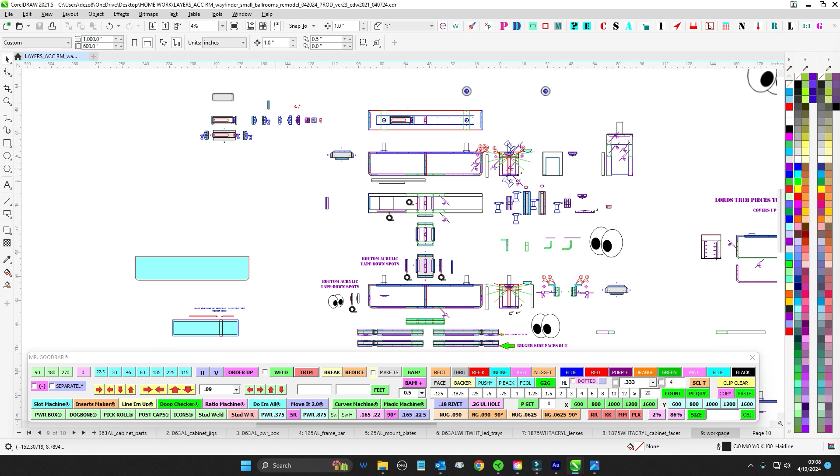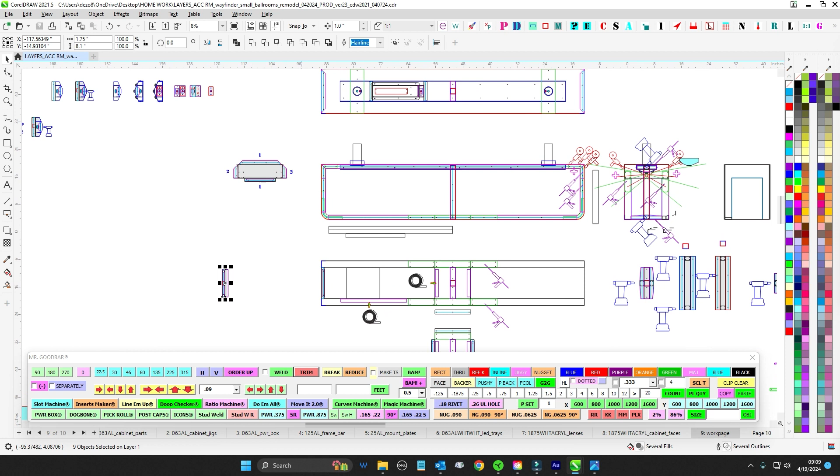Right, so it's that time again. Got ourselves another one here. So this is going to be kind of a quick review of the ACC hanger. I know that's old news for you guys, you've already made it, but when I opened up this file, because it's from 2016, I was like, what was going on? It wasn't as bad as my really early stuff, but it wasn't as organized, and it was before I started labeling things clearly, so everything was spread out and I was like, what's this piece over here? So in order to save you guys from that, and I'm sure you'll get back in the groove since you were already working on this, I just want to point out some stuff. I know you've already started on the lenses, but just to refresh my memory, let's go down memory lane real quick.

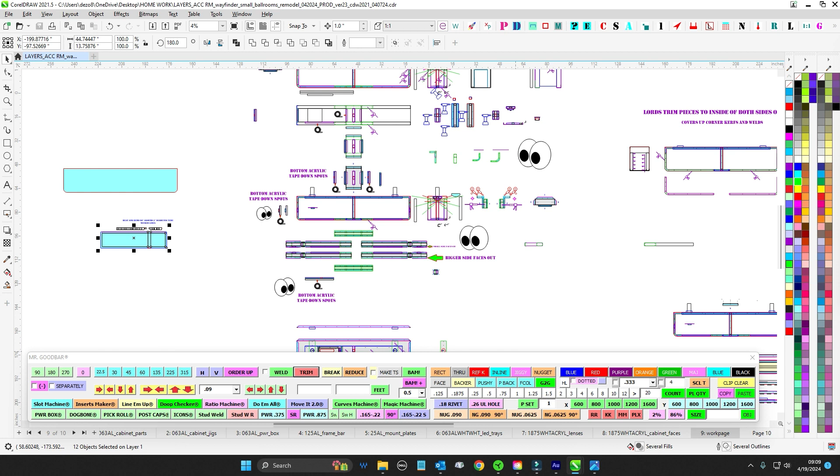So with that, let's get started, let's get after it. So we got the lay of the land. All this stuff is 063. We were trying to keep it super light, but it's kind of a pain to work with. But we have all our parts.

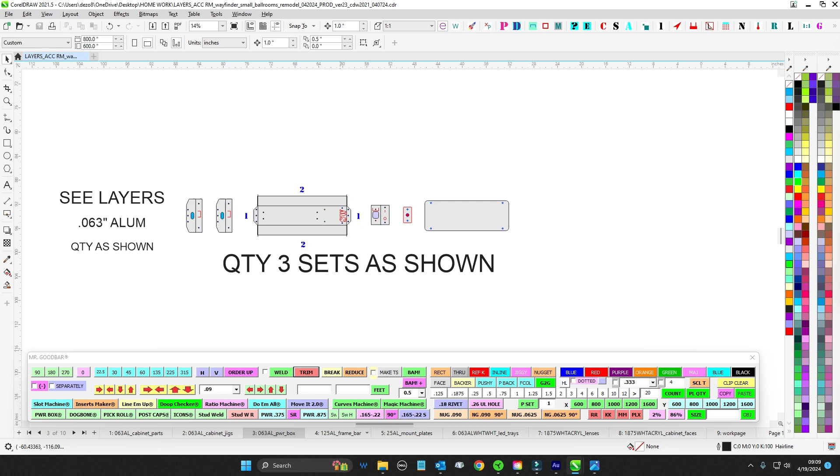We have 3 signs, so you have your tops and all your parts there for that. You get your jigs, keeping those out. And you got the little power box up top. Then we have this piece of 1/8 that's the main structure bar, and then the weld-in bars here, and then the beauty caps up top for the little post.

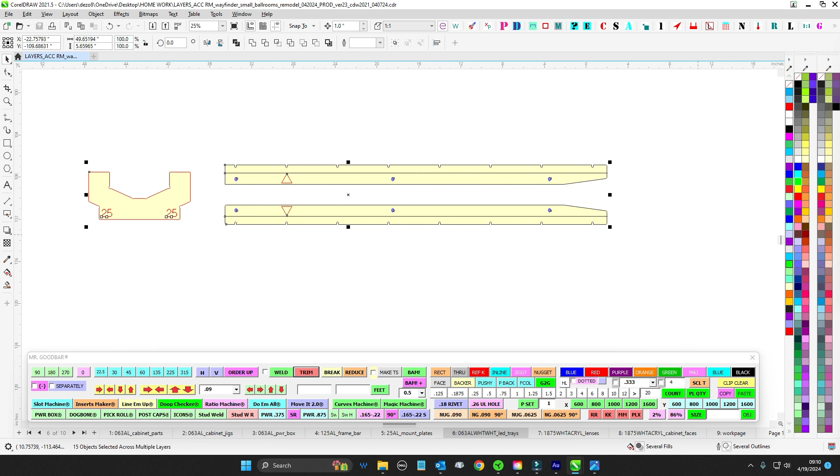I modified this piece, not that you'd remember the other one, but these are the LED trays. And these guys here are the jigs you use for LED spacing, because we're making the LEDs do sort of a wash instead of a full blast. So you're already on the lenses, and then those go straight to paint, or to the finish shop, and then they get painted.

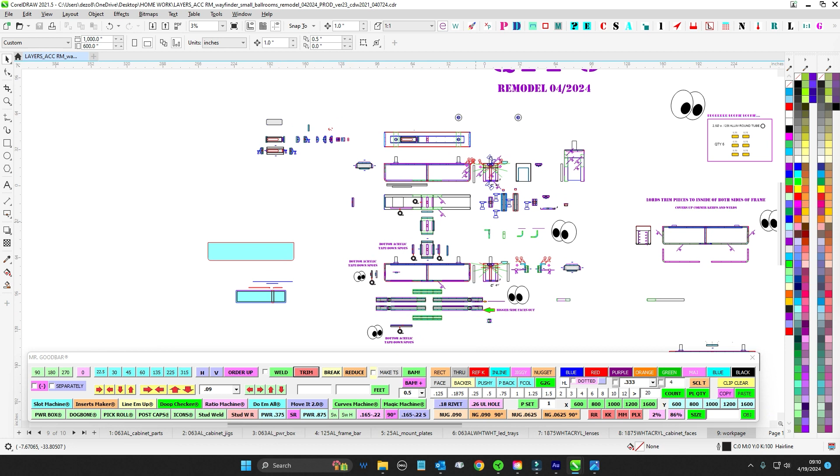Anyway, you'll get the hang of it pretty quick. The whole procedure was you start with this inner core post. I also made these available on the server, so you have this picture here of that main post thing.

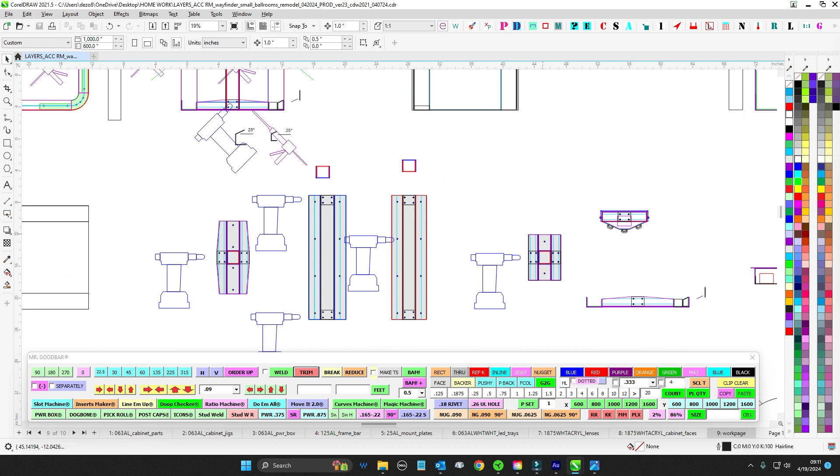Now, this one is actually one of the big hangers. When you review the photos, this is the big hanger, but it's similar, right? So these are the small hangers. You start with that inner core thing, and you rivet that together. Once you get this inner core set up with all these guys here, that attaches to the 1/8 inch piece.

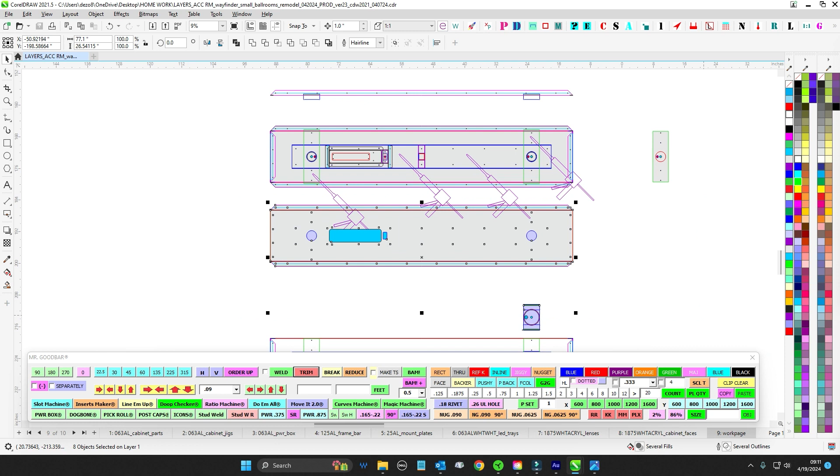You can see where that attaches, and then you get this bent up, and that's across the top. Then you slide in the quarter pieces. You can't slide them in after you put the topper on, so there's the topper there, the 063 topper. You have to follow that order: get this riveted together, slide these guys into the 1/8 inch piece, and then bring the topper on top of that.

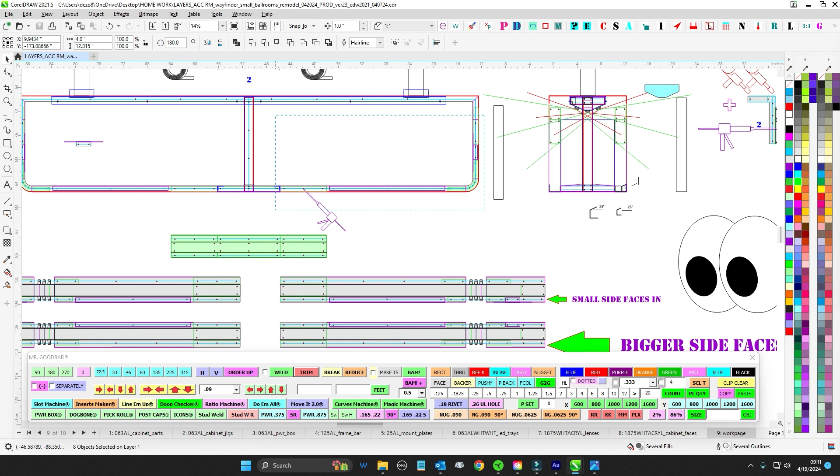Separately, you're going to make up the J's. You just make up these parts here, if you recall, these guys here, boom, boom. So you make up those 4.

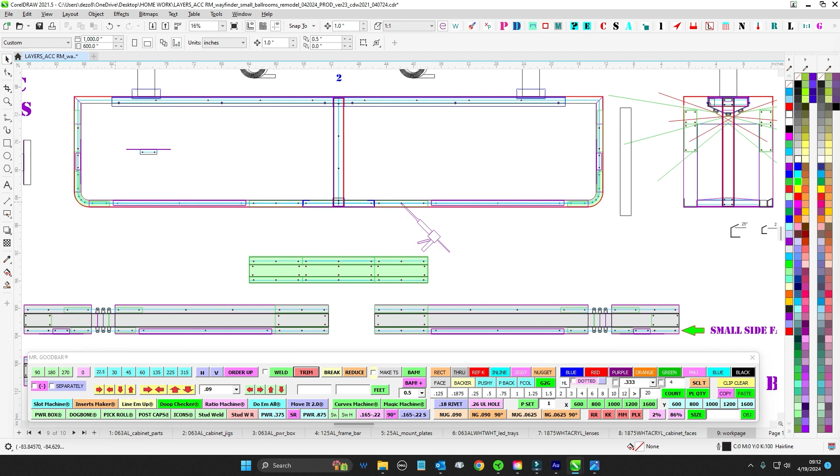The bigger piece, the bigger retainer, is the 1.25 inch versus the 1 inch. The 1.25 inch side actually goes to the face, since it's bigger and gives more room to put the black tape they use to keep the face where it's supposed to be. That goes to the outside. The 1 inch goes to the inside. Small side faces in, bigger side faces out.

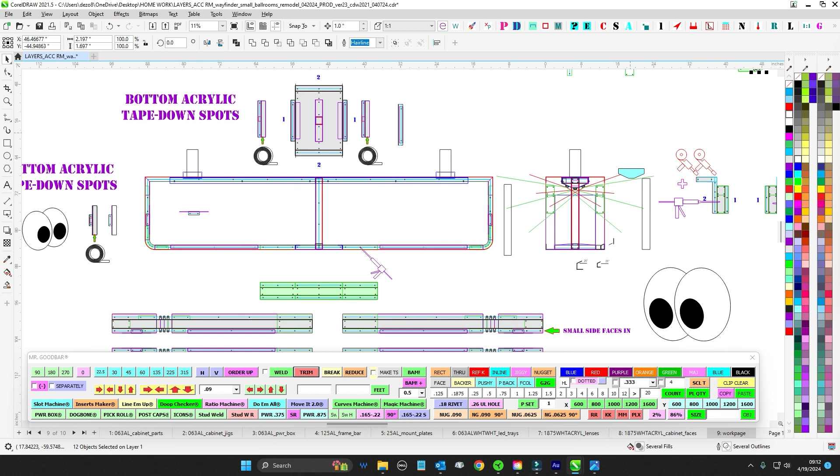And that's how it is with your jiggies too. The jiggies here have this larger corner piece for your outside, and the skinny guy is for your inside. So you can go ahead and make these separately, weld these up, and get those into the J's.

Then it's Lords-ing these splice pieces everywhere. This is the bottom pan, and you can see where that part aligns with the bottom here. This guy, that's the bottom, so that locks into there.

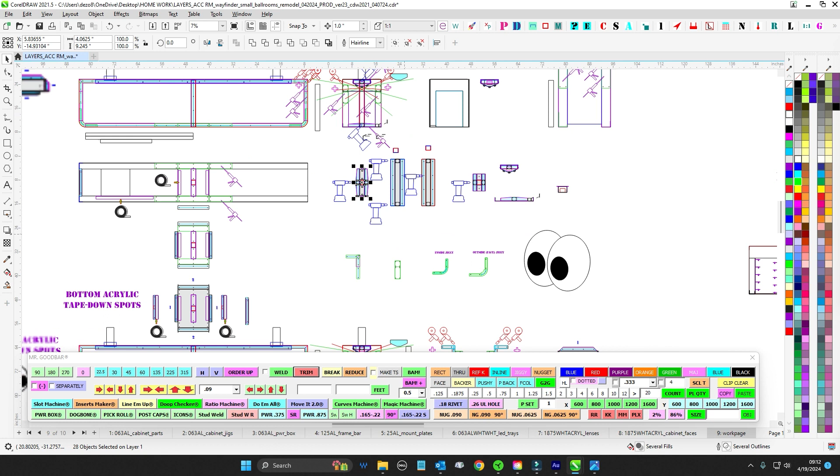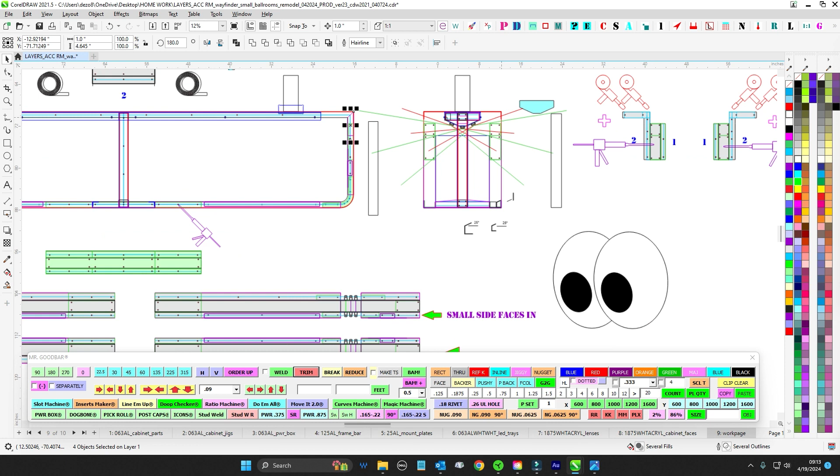Then you bring in and splice in your J's, and you have these guys here. If you recall, it's actually a 1-2 thing. This part here is your corner jig for the corner of the cabinet, and this part is the Lords-ing part that brings the top of the J in. So you Lords that together, then Lords that together down on the bottom. Then you have this little side piece that comes into the top, and that's this part here - yeah, here it is over here. So this guy here attaches there.

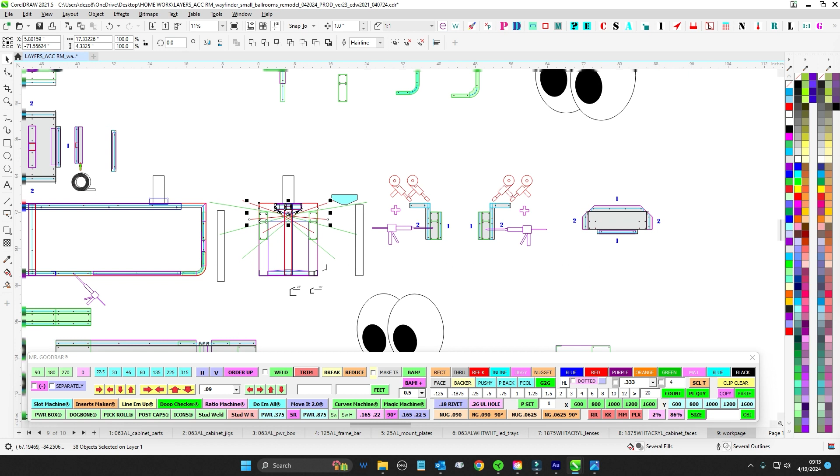That's this top part here, so that gets tacked in. It's a little bit of tacking, a little bit of lordsing, if you recall all that. So once you get the frame set up, then you have these beauty pieces.

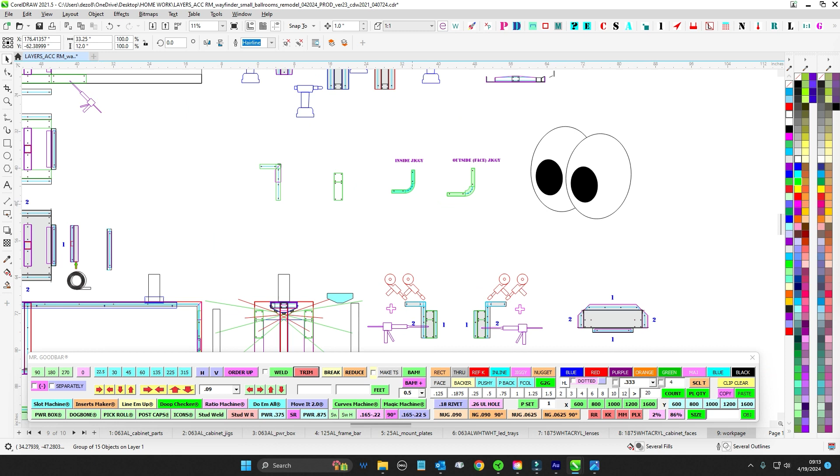I was kind of like, what are these? Because these weren't internal jigs. I forgot that these are just beauty pieces, because you got this kerf chompy in the corner there, so this is all ugly on the inside.

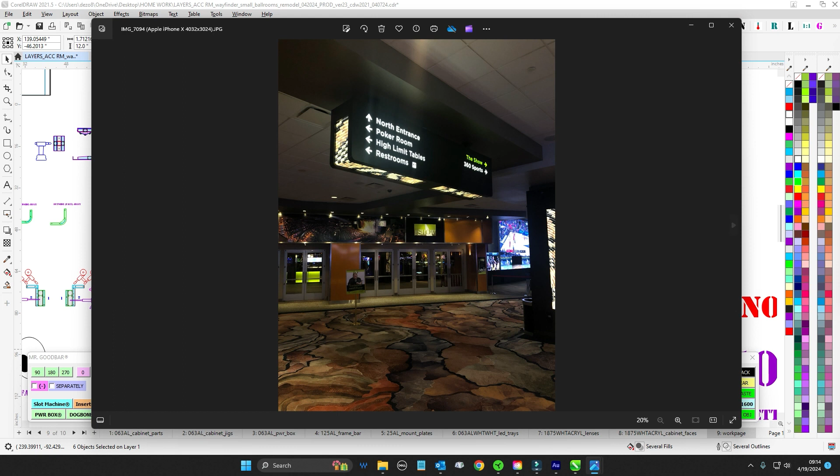So these are just trim pieces that go to the inside, and you lords those on and make them look nice, and they get bonded up. So when people look up to the photo, inside here, that's all clean. There's 4 of them, just beauty strips to make it look nice on the inside. That's all, but yeah, I was kind of like, I don't understand what those are for. It took me a second to remember.

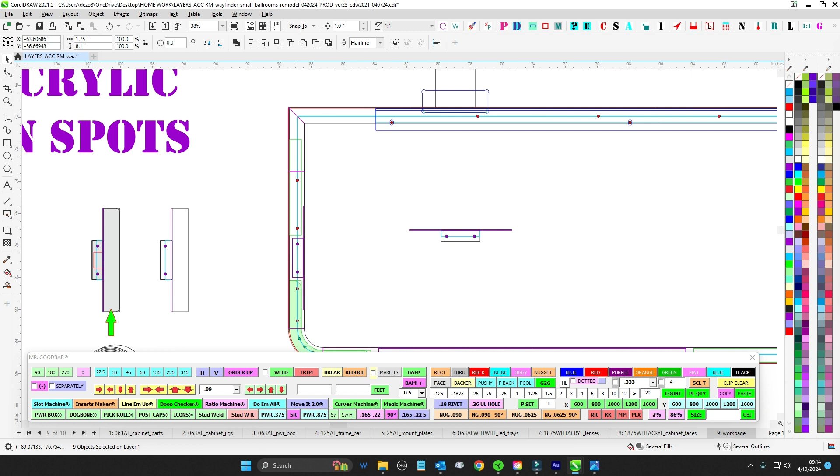So you get that all set up, and then comes all these little pieces on the inside. These are just tape landing spots. You have one here that fits in between the jigs, this jig and this jig. So this guy tucks in there, you tack him in, and that gives you a landing spot for black tape.

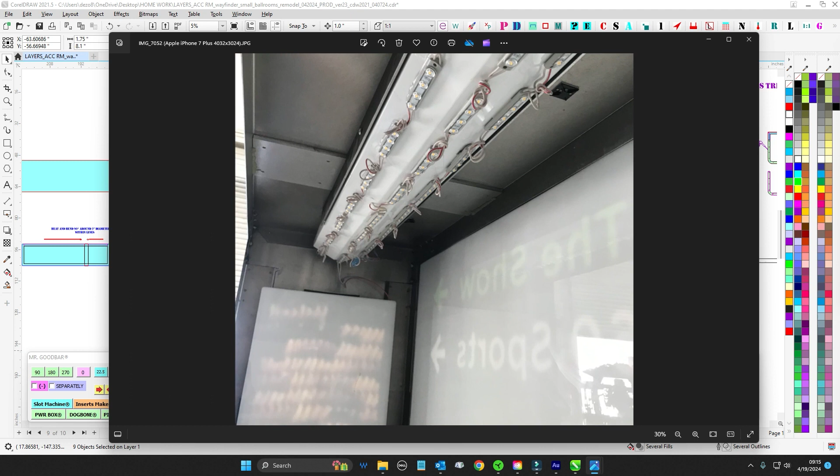And then you have one along the bottom there, right here, that's for black tape. Those are for the lenses. I know you guys are going to probably rely heavily on all these pictures, but you can see just right there, just a little bit of black tape. That's the top one there.

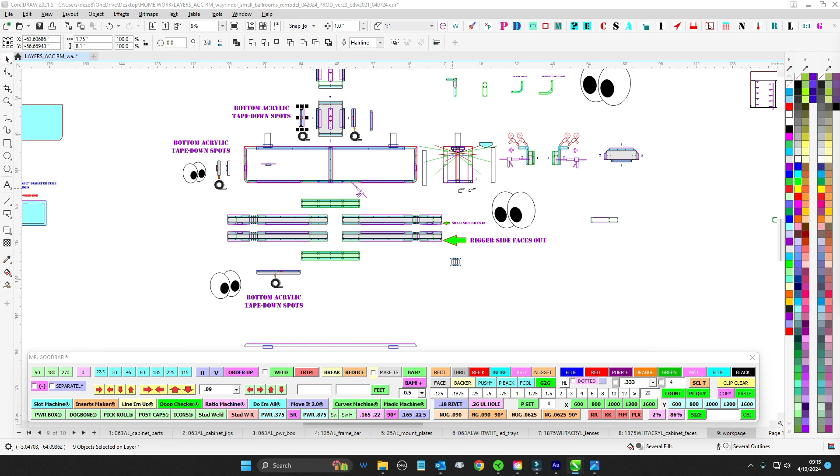And then there's side ones, a little bit of tape there, but these are on the server, and a picture's worth 1,000 words, but I'm definitely gonna say 1,000 words anyway. That'll give you guys a little heads up. I think you guys got that part pretty good.

Get your power supply thing, and then that goes on the top. Get all that riveted together. And then just to touch on LEDs, these little tray things were kind of confusing because I forgot how they work.

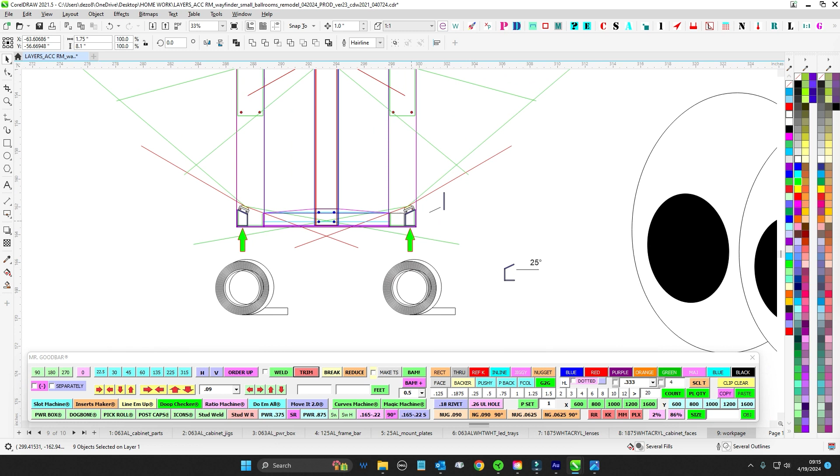I know this top one was this deal here, that goes to the top lens there, but I didn't have this, I didn't record this part. These were still, we got it into production, and then I just left it. So when I came back, I forgot, I didn't know what we did with these little bottom trays.

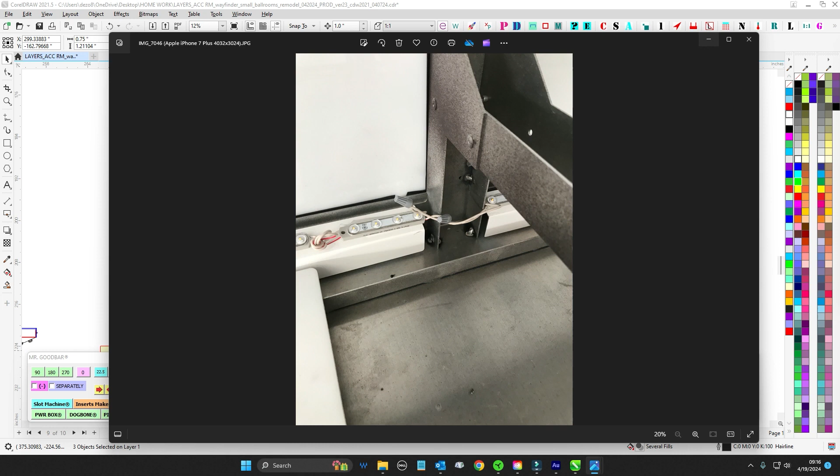But thankfully the pictures show that they fire back into the sign. We're relying on that cone to wash the bottom, but this right here is actually firing across the cabinet to help wash the whole thing. Spacing is sort of important for that, so just do the best you can.

But if you remember, that's what these guides were for, because then I'm like, well, what are these sawtooth things for? So I created this so we can remember, I didn't do this for myself last time.

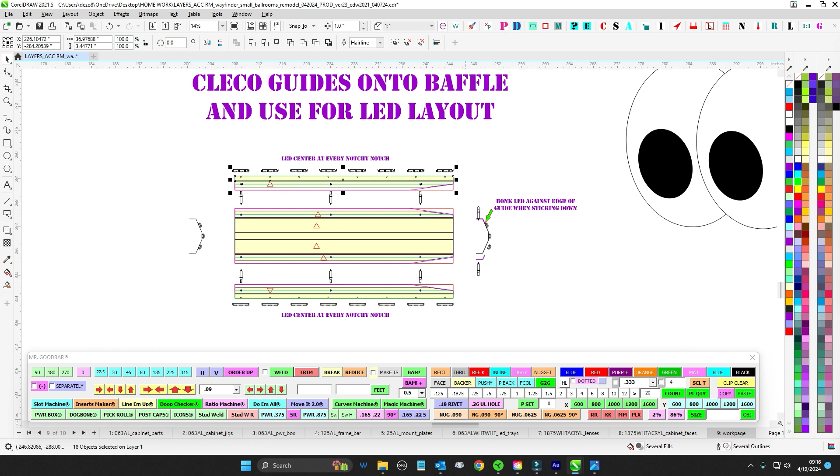So what you do is take this jig and you Cleco it to the thing, and then you go ahead and put the center of each LED on each notch, and that will give you that nice proper spacing to give nice even coverage for these guys.

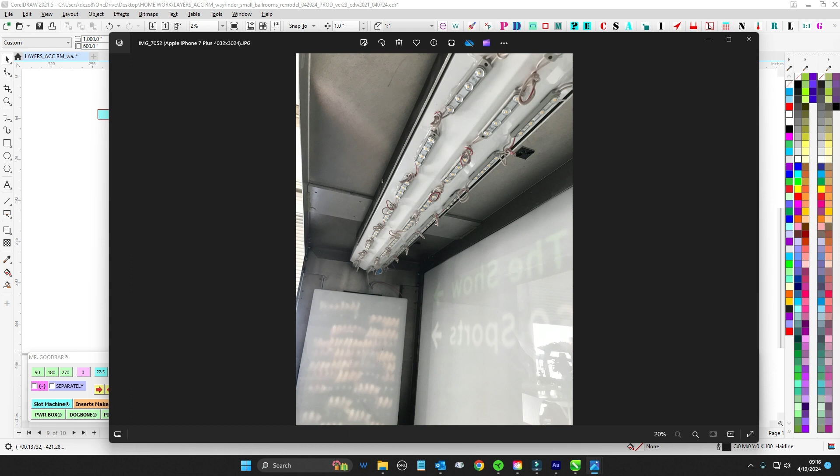And there's another shot there, there's the black tape there. So get all those guys, and there's those internal pieces there. So again, go to town on these pictures, it's all good.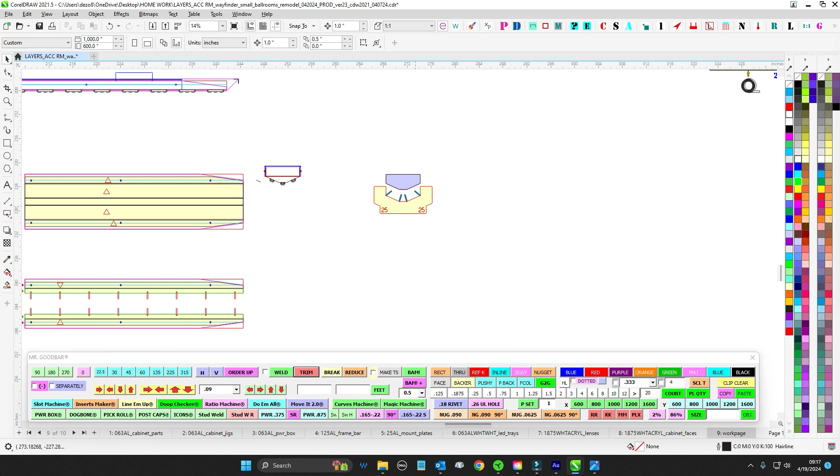And then I gave you guys, I modified this jig. This jig gives you the bend, the proper bends for the top part. And then if you use this as 25, that gives you these bottom guys here that tuck in there, that's that 25 degree. So just do this one 90 and then match this one to 25 that matches that guy. So I gave you those.

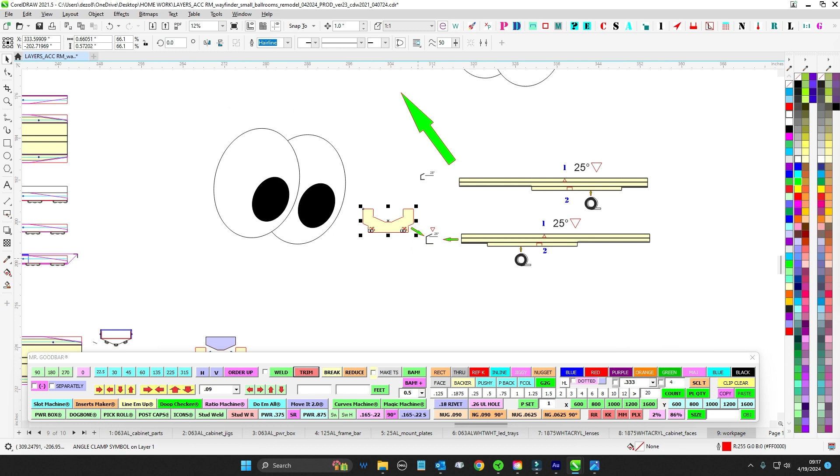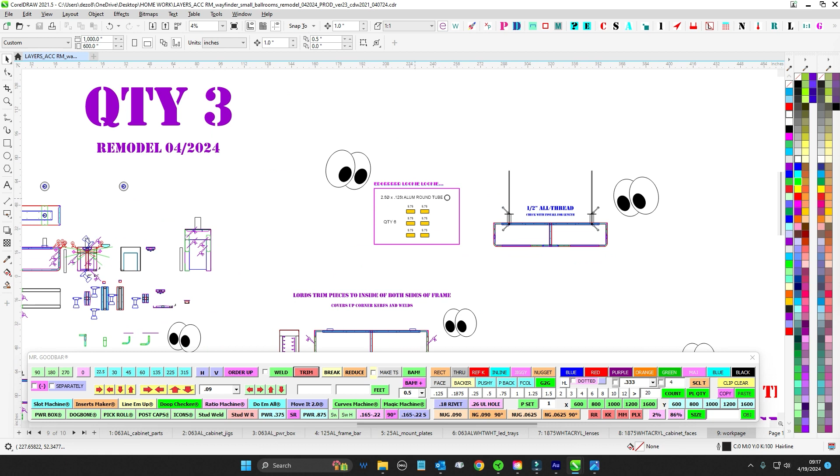And then according to the pictures, we definitely did the all thread. It looks like probably 2 feet of all thread. It might be 18-inch because if this is 6, we got, so probably 2 foot, 1/2 inch all threads. What's up, beggar? So you remember there.

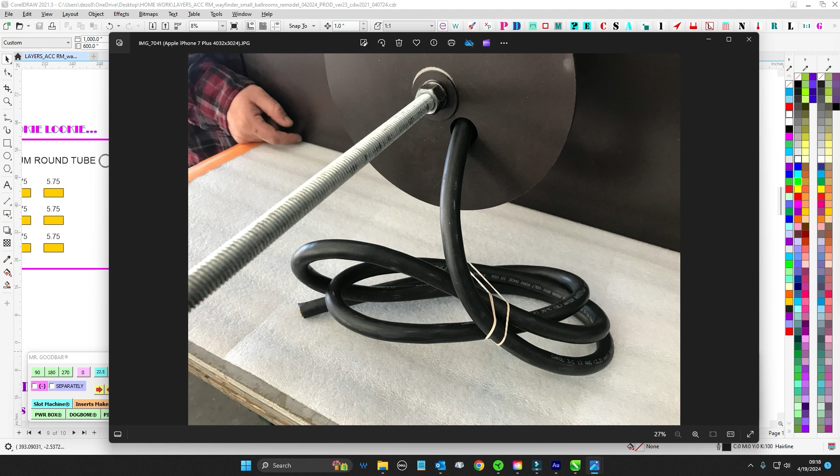Yeah, definitely go to town on the pictures. And then if you remember, we brought that, that's why we have that spool. We brought that cabling so that way they can run the leash and be all UL. So bring that cabling in.

I think that's it though. I think you guys will, I encourage you guys maybe to just do one, get your eye in, remember everything, and then knock out the other two. So anyway, but I think that's it.